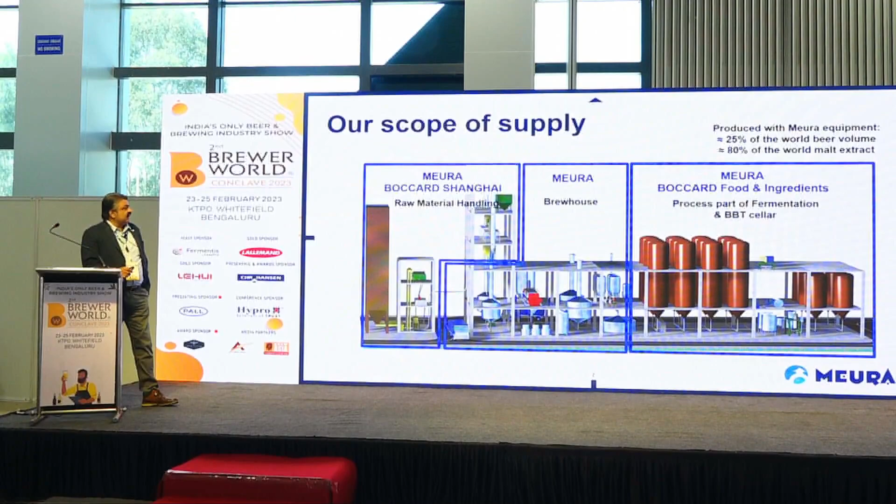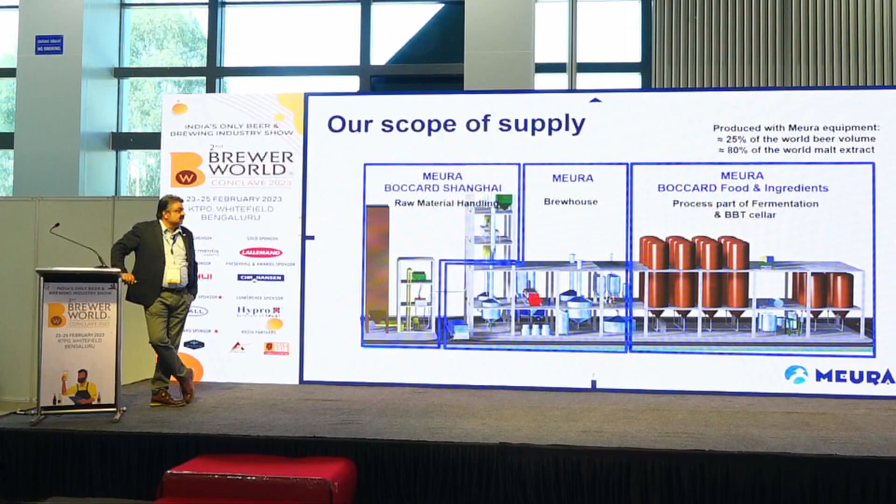We can supply for the brewery - raw material handling, brew house, and cellar part. We can say Meura equipment produces 25% of the world's beer volume. 80% of the malt extract produced all over the world is coming through Meura equipment. So that's the reach of the technology.

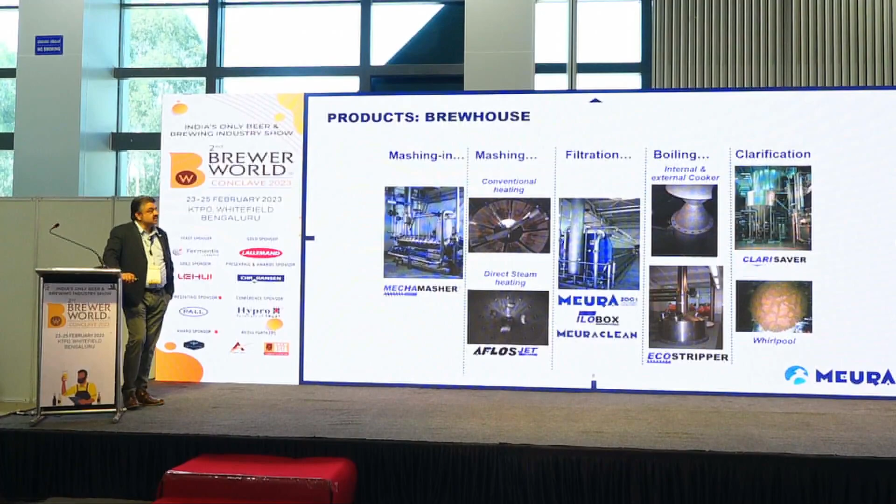Different options or different equipment in the brew house for mashing in - we have a mecha masher, we have an Aflos Jet technology for mashing. Filtration is the heart of the brew house - Meura filtration. Boiling with an EcoStripper, then clarification - ClariSaver. These are our technologies for the brew house. As I mentioned, we have been making mash filters since 1901 - this was first presented in an exhibition in Belgium.

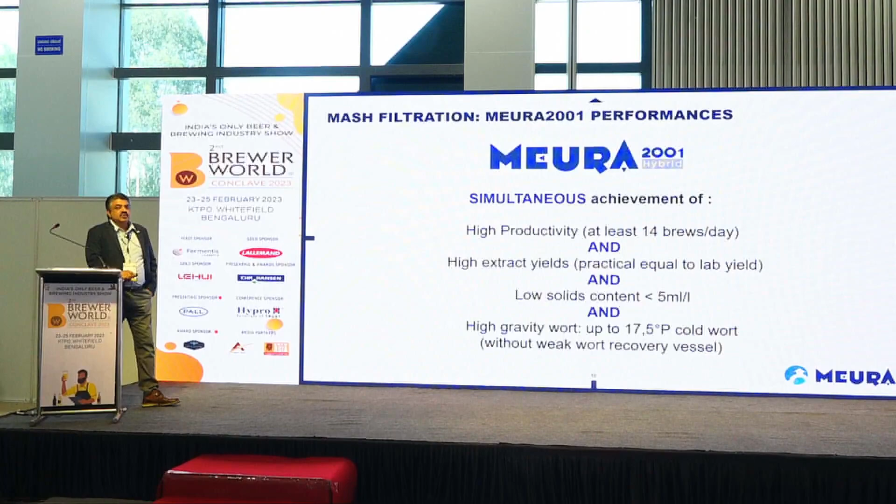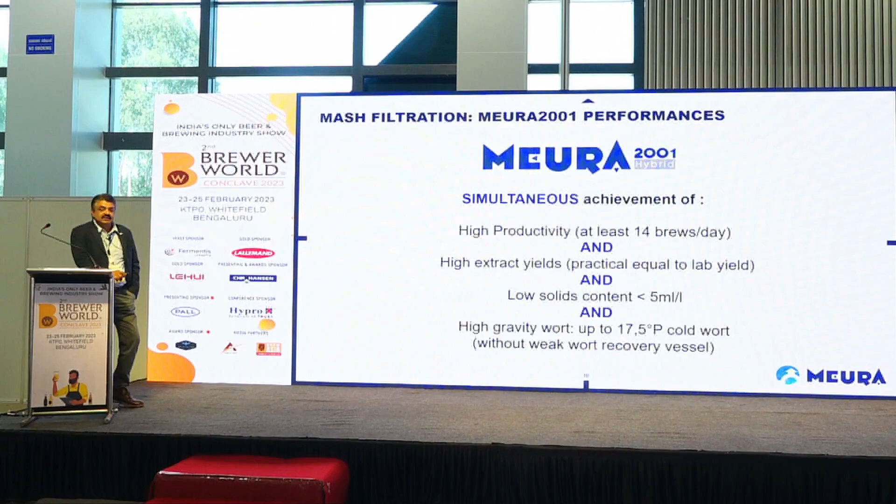So the advantages of Meura technology are high productivity - you can produce more than 14 brews a day, at times we achieved 18 brews a day. High extract yields, practically equal to the lab yield - so we can say 100, 102% of the extract yield. Low solid content in the wort, less than 5 ml solids per liter of wort. High gravity - we can go up to 17.5 degree Plato of cold wort without a weak wort recovery system.

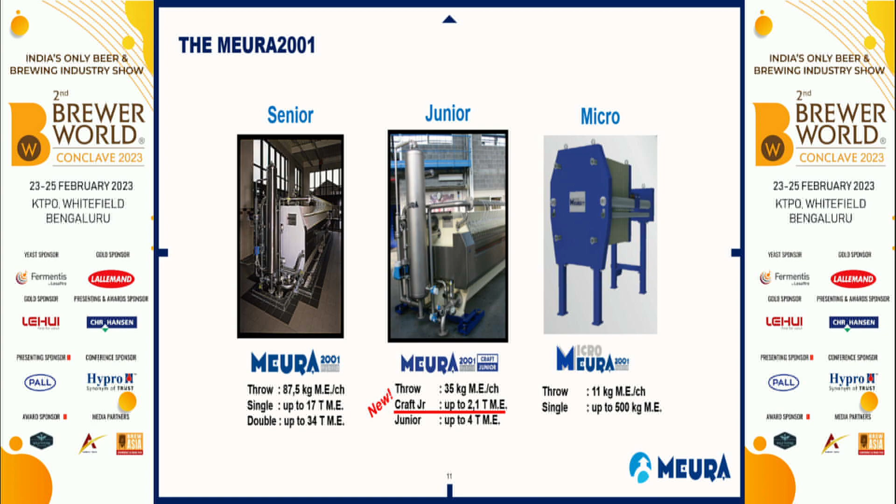So we have 3 variants of the mash filter, the Meura 2001 mash filter. We have a senior model which can go up to 17 tons malt equivalent, or if you double it, 34 tons malt equivalent - it's a bigger one for big breweries. Then we have a junior model which can take 35 kilograms per chamber, and there is another version for craft brewers called Craft Junior, which can go up to 2.1 tons for the filter. And then we have a micro filter, used for micro breweries, which is 11 kilograms malt equivalent per chamber, and can go up to 500 kilograms of malt equivalent per batch.

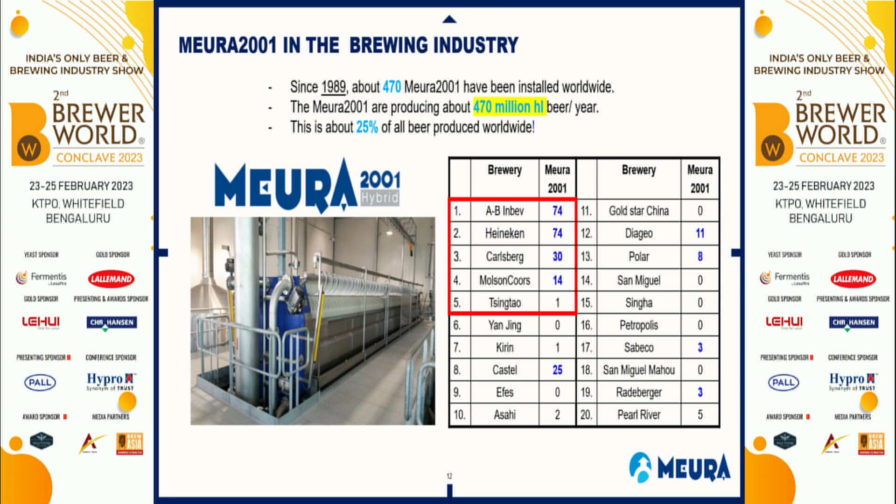So we can say that since 1989, there are more than 470 Meura 2001 installations all over the world, and they are producing 470 million hectoliters of beer every year. This is about 25% of the beer produced.

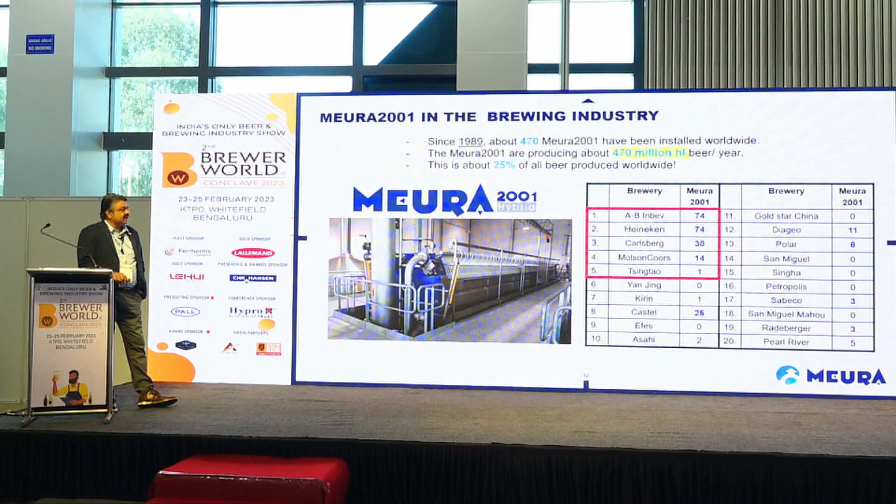We have many references in the global market, with global brewers like AB InBev, Heineken, Carlsberg, Molson Coors, and Tsingtao.

I will jump to the craft brewing references. Maybe most of you know these beer brands, but it is interesting to know that they use Meura technology. The Trappist Chimay beer, which everyone likes, is made through a Meura filter. Hoegaarden is made through a Meura filter. Trappist Westmalle is also made through a Meura filter. Rodenbach, Affligem, and Saint-Feuillien are made through Meura filter too. These are different brands of craft beers made through Meura technology, like Leffe, Grimbergen, Stella Artois, Maes, and Jupiler.

Then we have some references in North American craft brewers, like Alaskan Brewing and Griffin Claw Brewing. So there are many references in the craft brewing segment in Europe and in the USA.

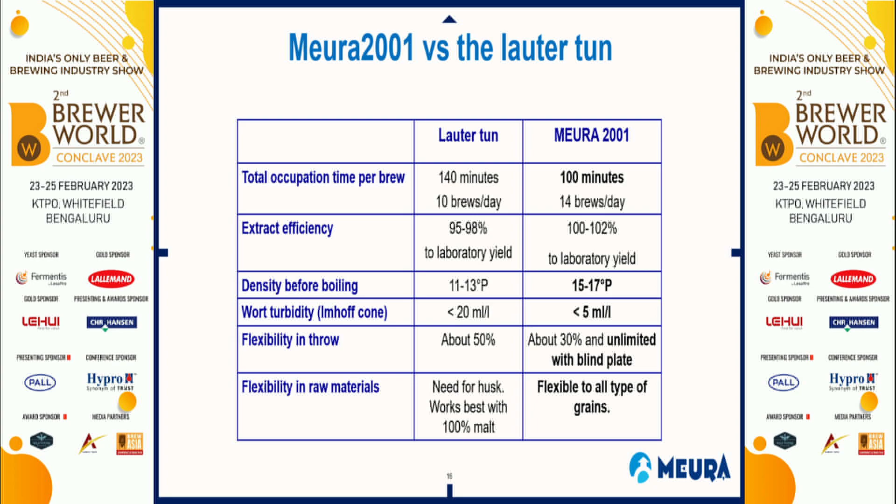Let's go to the case study of craft brewing using Meura technology, comparing Lauter tun, which is used presently, and Meura technology, which we are proposing. The total occupation time for a Lauter tun is about 140 minutes. A very good design Lauter tun can give you 10 brews a day, normally 8 brews a day. The Meura 2001 mash filter can give you 14 brews a day or even higher.

The extract efficiency for a Lauter tun is 95 to 98%, and it can be lower if you go for high gravity brewing. For a Meura filter it is 100 to 102%. The density before boiling produced by a Lauter tun is 11 to 13 degree Plato, whereas for Meura filter it is 15 to 17 degree Plato.

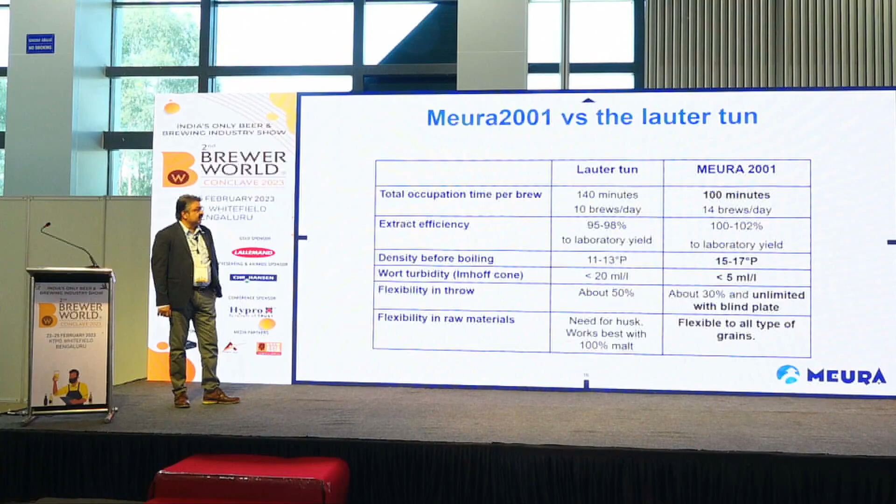The turbidity is close to 20 ml per liter for Lauter tun, but less than 5 ml per liter for the Meura filter. On flexibility of throw, a Lauter tun can take 50%, but that's questionable because then you have problems of turbidity and extract efficiency. A Meura filter can have 30% flexibility, and with a blind plate you can have even more flexibility.

We were speaking in the morning panel discussion that if there is no husk, it is difficult to brew. Lautering requires husk and works with 100% malt, whereas if you are using Meura 2001 technology, it is highly flexible for all kinds of grains.

Let's take an example of a 100 hectoliter brew house with a mash tun, a Meura 2001 Junior, a wort kettle, and whirlpool, making 400 brews a year, 40,000 hectoliters per year, with a throw of 2,600 kilograms of malt per brew. It is possible to make 4 brews in 12 hours or 8 brews in 24 hours with a Meura 2001, whereas with a Lauter tun you can make a maximum of 2 in 12 hours or 4 in 24 hours.

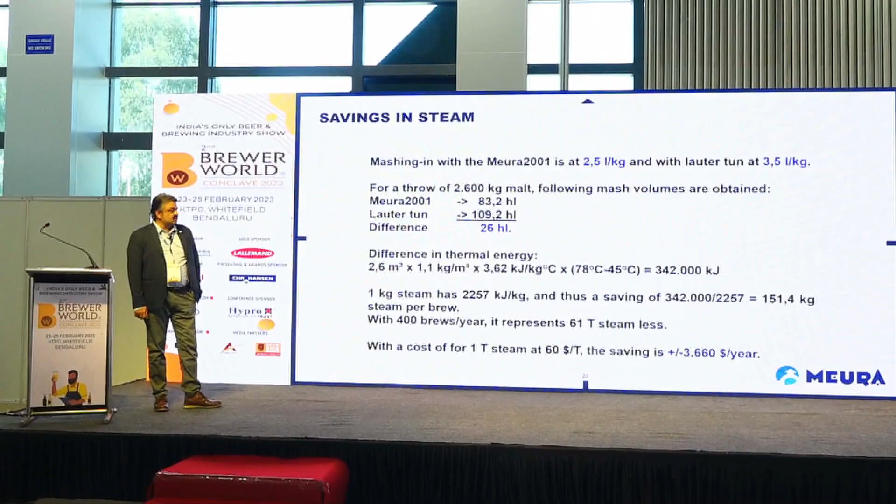The thermal energy required to heat the mash will be lower because we have 26 hectoliters less water, which converts to 342,000 kilojoules. Since 1 kg of steam is 2257 kilojoules per kg, the saving of steam per brew is 151 kilograms, and every year for 400 brews that's about 61 tons of steam saving. At a cost of $60 per ton of steam, the saving per year could be around $3,660.

So if you put all these things together, there is also a better hop utilization when you produce from the mash filter technology. So 10 to 15% less hops are required when using the mash filter technology. They are also saving there, which we are not considering in this calculation. So we can say about $1 to $1.5 per hectoliter saving can be achieved with the Meura 2001 technology.

Continuing the morning topic of using different types of raw materials for making beer: the high flexibility of Meura 2001 technology allows us to use different local raw materials like millet, barley, wheat, rice, maize, ragi, oats, rye, sorghum, bajra, cassava, corn, starch, and the list can go on. You can use 100% of adjuncts, 100% unmalted grains to make beer. That's the advantage of Meura technology.

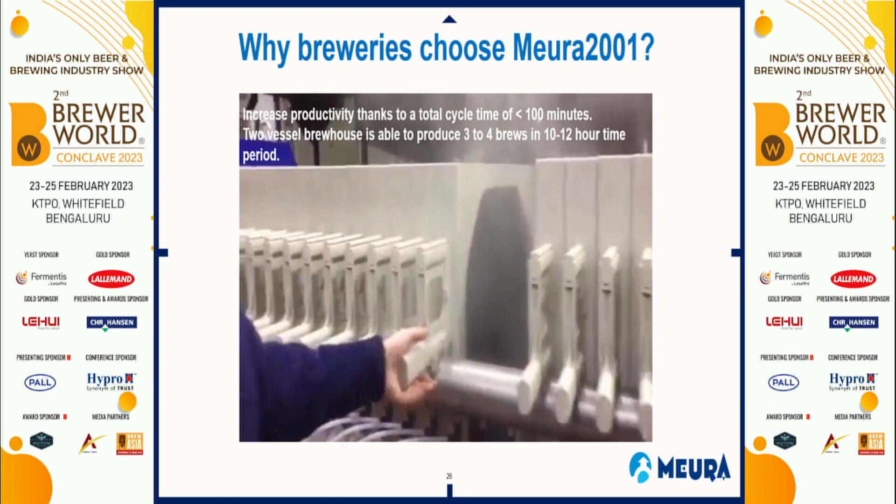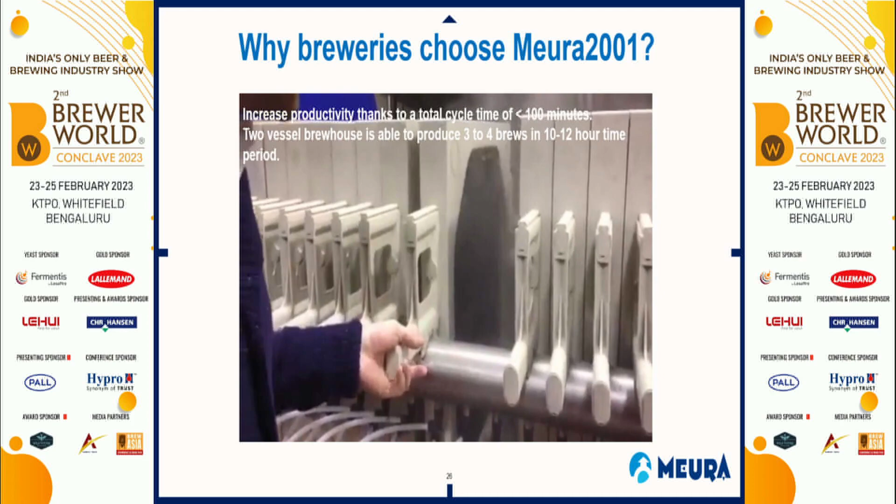The increase in productivity is because of the lower cycle time. The 2-vessel brew house can also produce 3 to 4 brews in 10 to 12 hours. You can see the simplicity of the operation for craft brewers or micro brewers - just 2 persons, very simple operation, no high automation. As I talked about the flexibility, we have different models and can design it for the customer requirement and the size of the brewery.

Again, for India, we can use the local grains and make different beers. It's a kind of playground for craft brewers to use the Meura technology and make different beers and flavors.

Specific to craft brewers, the time saving is important. Brewing more beer in a shorter time means one operator is making more volume of beer. There is a possibility to brew with all kinds of raw materials. High gravity brewing, very high quality wort can be produced. You can even use high quality first wort at 24-degree Plato, so you can make barley wines with the same equipment. There is full flexibility through the chambers of the Meura 2001.

They have 30% flexibility inbuilt, and you can use blind plates to take it down to maybe 30%. So you can make smaller brew sizes, pilot brews. Maybe if you have a 10 hectoliter brew house, you can even make a 3 hectoliter batch with the Meura technology.

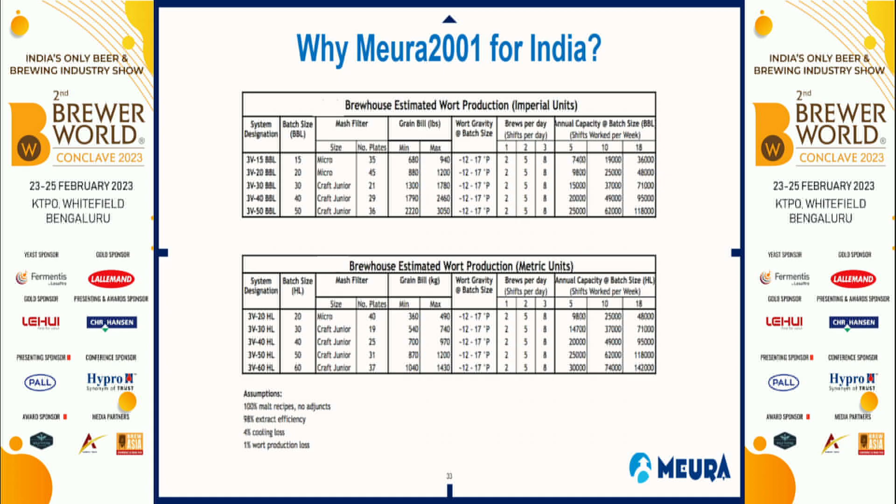These are some of the capacities possible with a 3-vessel system - let's see this table in metric units. A 3-vessel 20 hectoliter brew house with a micro filter can produce 48,000 hectoliters of beer annually, which means a 10 hectoliter brew house can make 24,000 hectoliters in a year. So if any existing brewery wants to expand and doesn't have space, this is the option. They can install a Meura 2001 filter and just double the capacity in a very short period of time, and also reap the benefits of higher extract efficiency, lower water consumption, lower energy consumption, and so on.

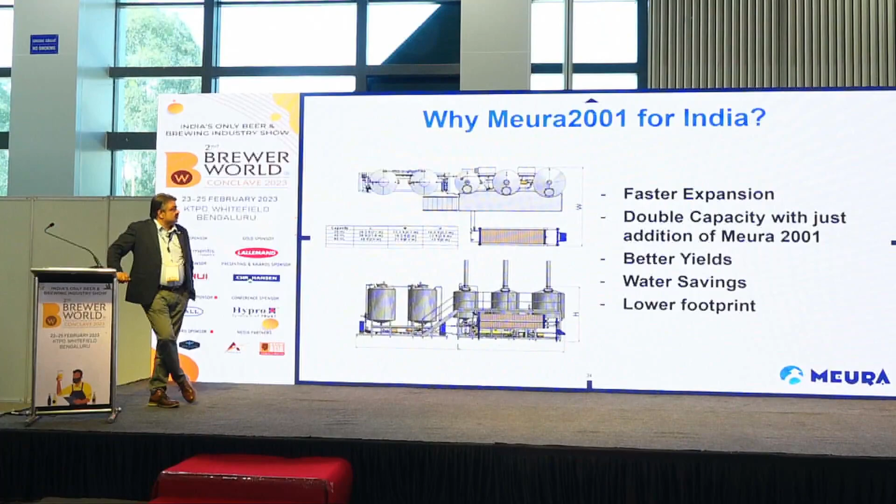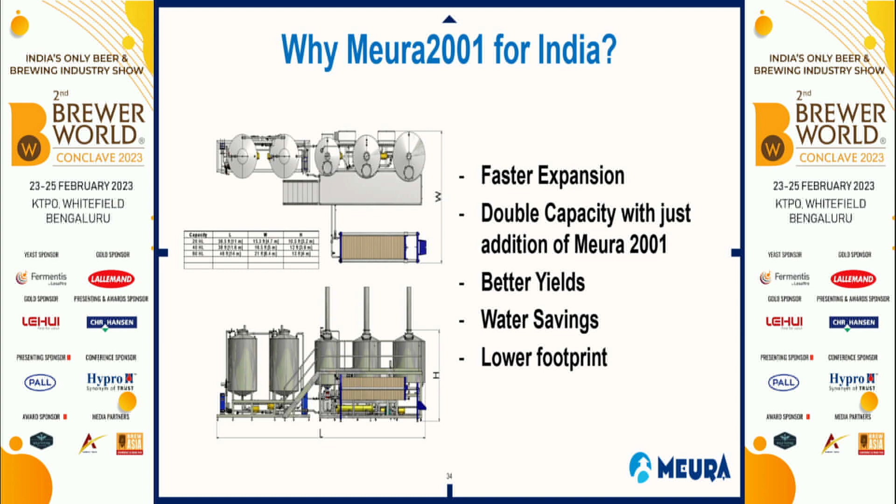So this is a typical picture of how it looks. It's a faster expansion, double capacity, better yields, water saving, lower footprints, and attractive paybacks.

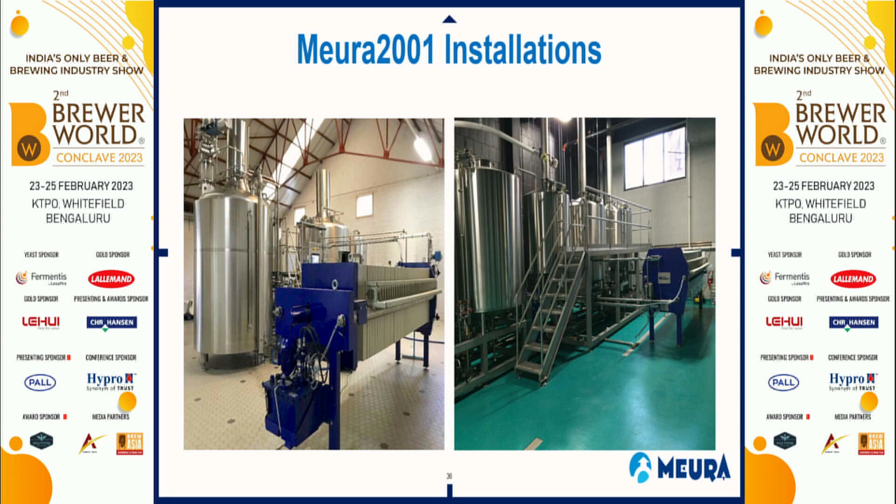Some pictures to show about the installations, and some of the brands who are using our technology - most of them are very famous and might have been seen by you. Westmalle, Delirium, Rodenbach, Chimay, Jopen, Affligem, St-Feuillien, Palm.

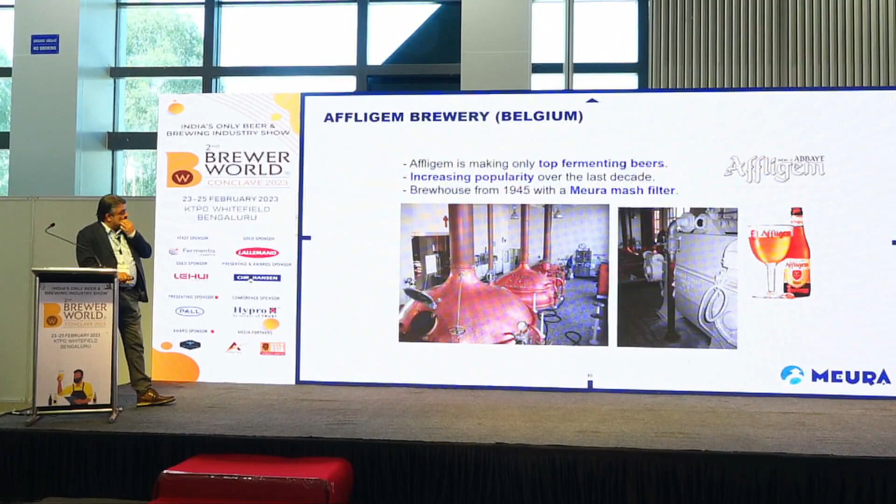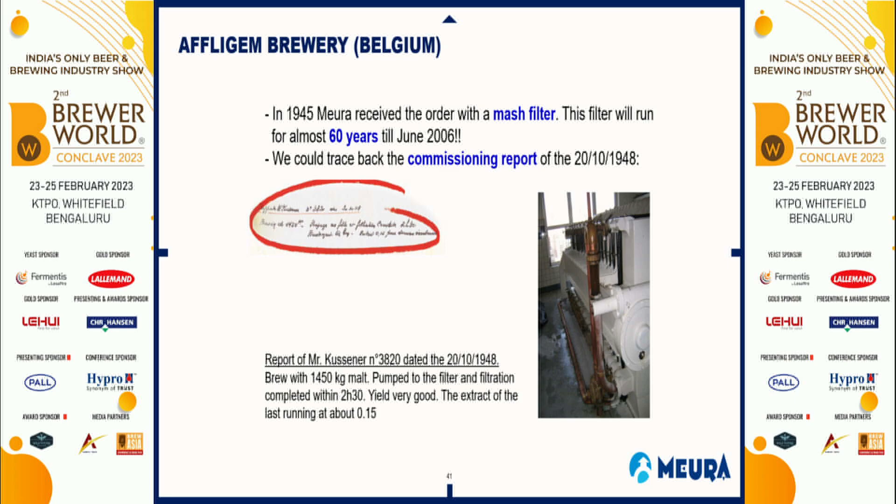Affligem is making only top fermenting beers, and they are using our equipment since 1945. You can see this is a report of commissioning from October 20, 1948, which shows they have been using the filter for the last 60 years.

Another brewery from Belgium using the technology is Deconinck. It's a 16 chamber Meura 2001, a smaller one.

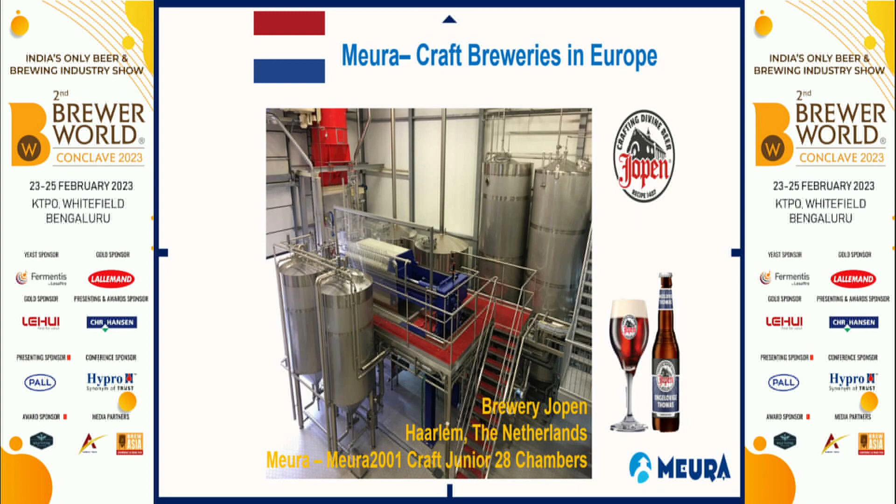Some of the pictures - this one, the breweries in Europe, this is a brewery Jopen in Haarlem, Netherlands. They are using a Craft Junior with 28 chambers, and you can see they are making a beer of 100% rye. It's an IPA made with 100% rye with a spicy taste of the rye malt. So that flexibility is provided by the Meura equipment.

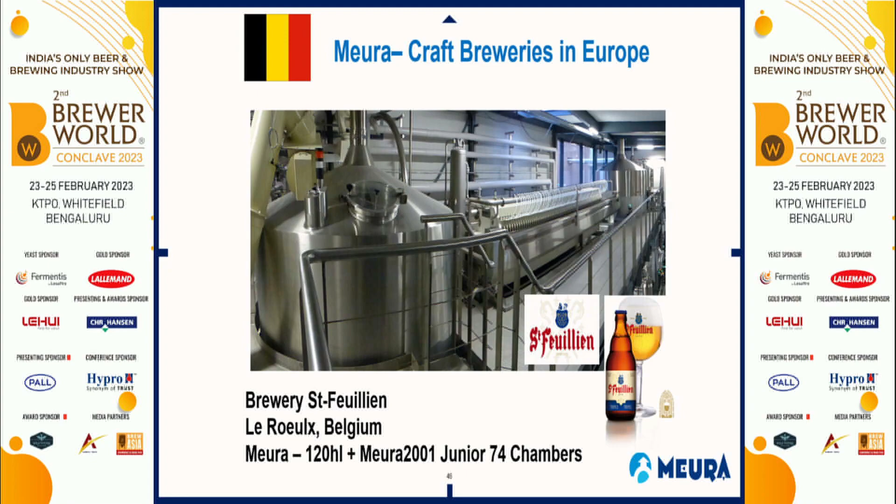This one is again in Belgium - a 120 hectoliter brew house. This is the first equipment we supplied to them in 1913, a Lauter tun. After 100 years, they replaced it with new equipment from Meura, which is a Meura 2001 mash filter. So you can see the long association we are enjoying and the technology which is running for such a long period of time.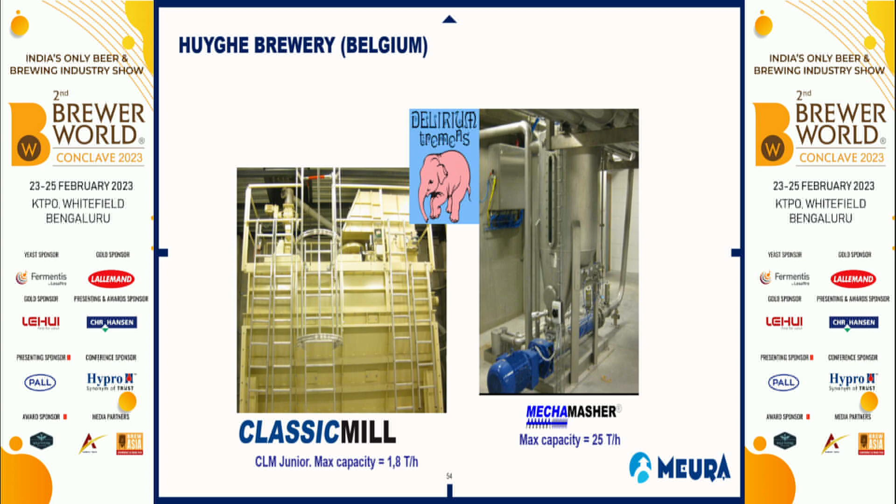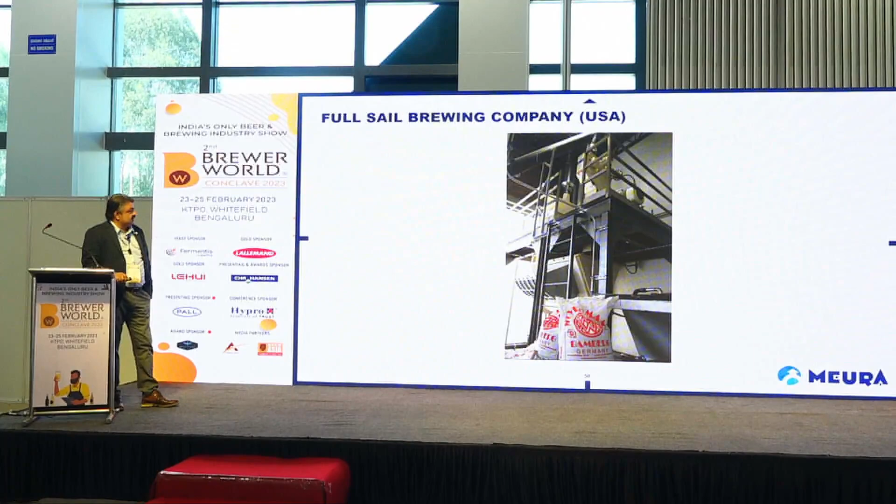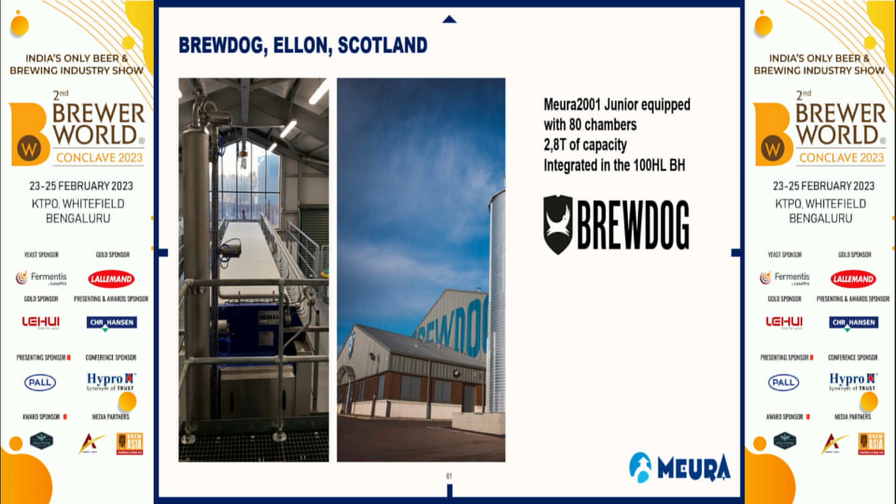BrewDog, the headquarters of BrewDog, they are using the Meura 2001 equipment with 80 chambers. It's an integrated 100 hectoliter brew house. So the BrewDog beer is also made through a Meura technology.

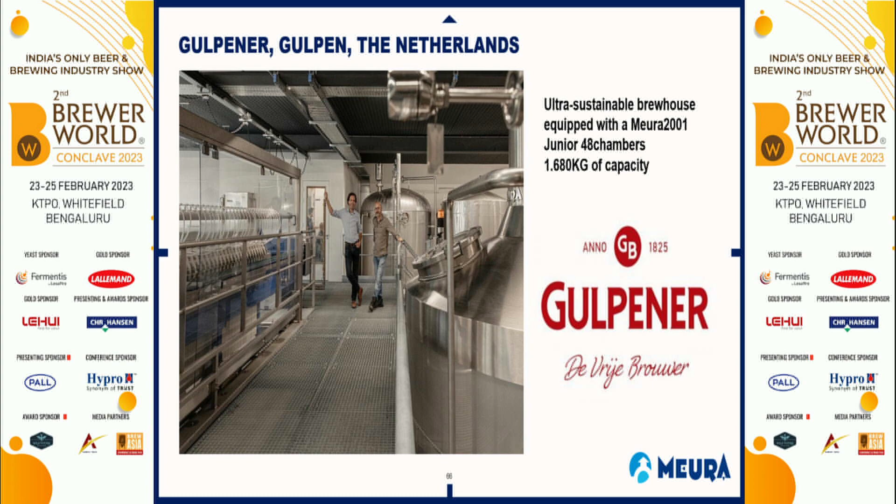because they are using a technology called Meura Stream. So, which is kind of reducing all the fossil fuel energy. You don't need any excess fossil fuel energy for your brew house to make beer, and that is why it's the most sustainable brew house. This technology can be used for any size of the brewery. So that is the advantage of it.

And so just maybe a trailer for the next topic maybe in future. It's the Meura Stream Green, and it is a revolutionary concept reducing the thermal energy consumption and production of excess hot water in brew house. Meura Stream has been implemented in many breweries worldwide, and the Meura Stream Green is an extension of the concept which makes possible to operate the brew house with a carbon neutral energy resource. So a brew house can be run without any fossil fuel energy. So this is the technology for the future, and we look forward, people are interested in it.

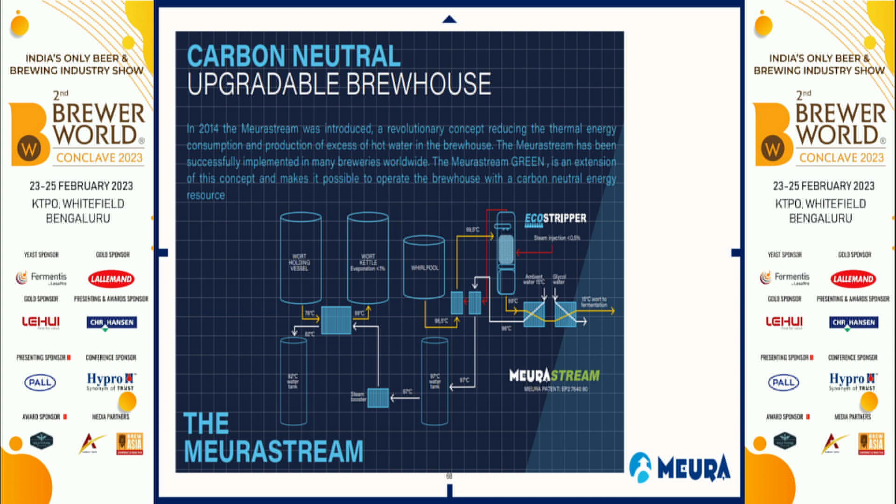So I definitely encourage the brewers, craft brewers in India to approach and discuss, because they are facing problems like brewing with high adjuncts, and they are with stuck mashes. They cannot go home early maybe, but with the Meura technology, they can go home early and watch Netflix movies. So let's discuss. Thank you very much for your attention.